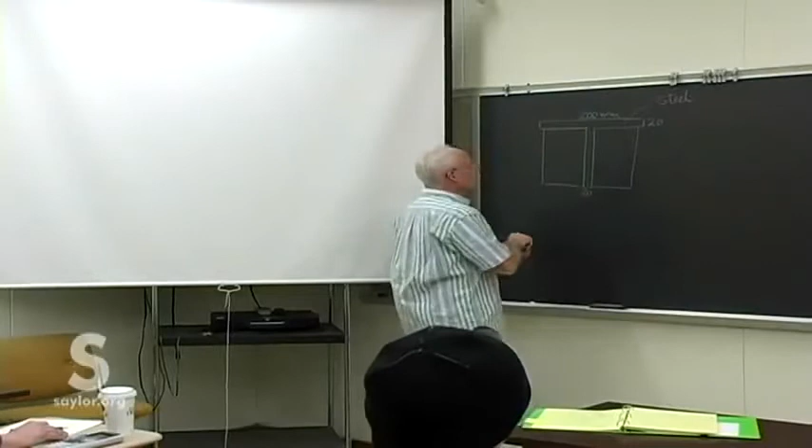And so I left you with a beam something like that, 200 millimeters across the top, 20 millimeters on that flange there, as well as down here on that T section. And that, I believe, was a steel part of the beam, and then bonded to it we had, I believe, some kind of oak timbers.

Specifically what it was isn't too much of a concern because I believe I gave you the needed Young's modulus. So there was our set.

That look vaguely familiar? Oh, and I had a given load of 50 kilonewton meters.

All right, so there we're looking there at the cross section of the beam. This being our y-axis up that way, and it doesn't matter really where the origin is. The z-axis that way, and that's the direction of our moment using the right-hand rule.

So if our thumb is in that direction, then the moment is such that it's the usual type of bending if we look down the great length of the beam. Something like that. That then being the x-axis. So that's where we left it.

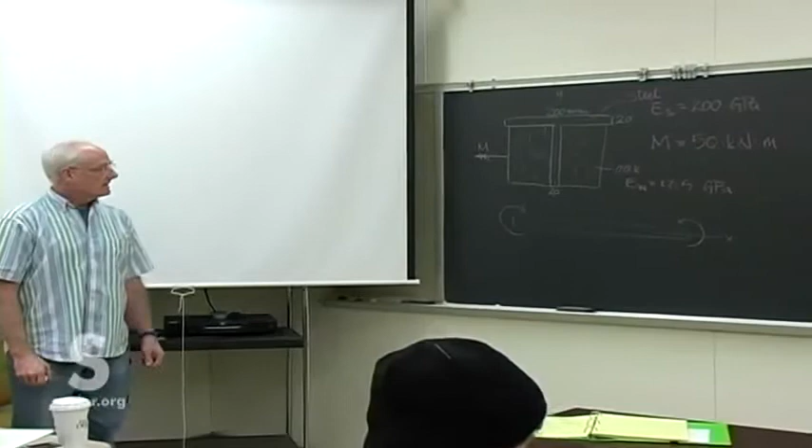The technique we're using, we don't know how to find... Oh, by the way, we are trying to find the maximum normal stress in the beam. We only know how to find that

for a homogeneous beam, a beam of a single material. But this is a beam of two materials. So our bending stress equation doesn't apply. It only applies for a single material. This is a two-material beam.

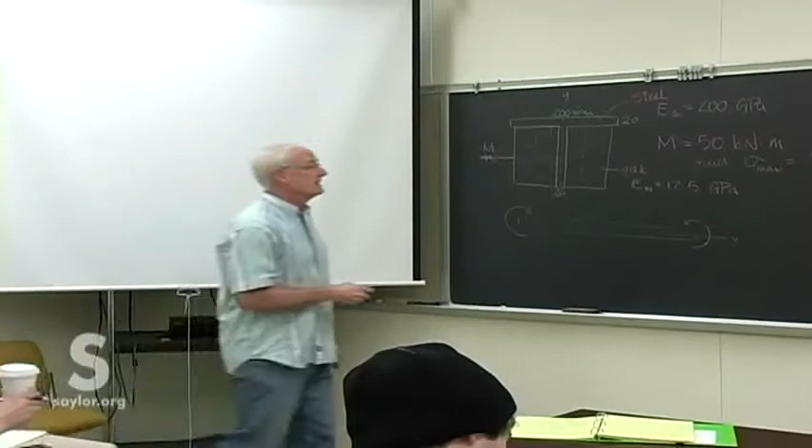But we developed the technique where we would take out one of the materials and replace it with an appropriate amount of the other material. And then we did have what we consider an equivalent beam. It's very artificial in its size and shape, but it does allow us to accurately calculate the stresses in the beam there.

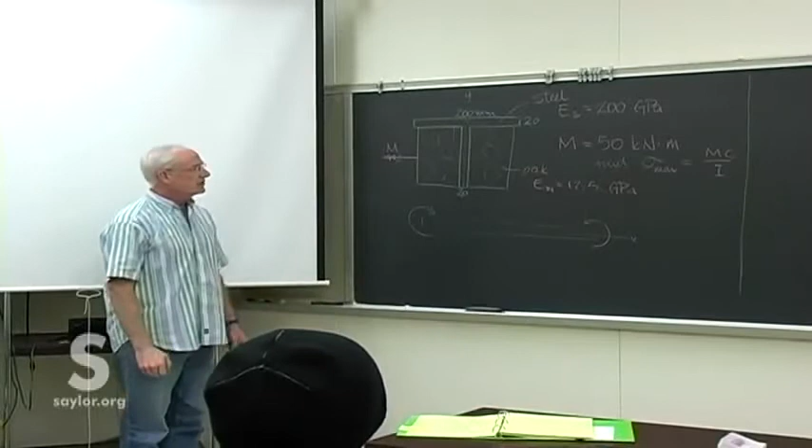So it doesn't matter which of the materials you take out and which you replace it with, you get the same answer either way, but we have to do one or the other. So did I actually suggest to do the one way or the other? No. All right, so have to pick one or the other.

I'll replace the steel with wood in the beam. So anywhere there's a steel part of the beam, I'll take it out and replace it with wood. But I can't replace it with the same amount of wood that there is steel, because steel is very, very much stiffer. You can tell by the much, much higher

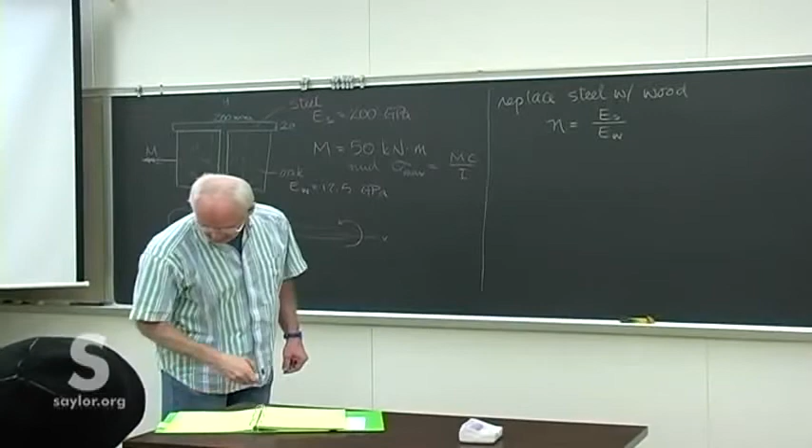Young's modulus. So we employ this factor N, and we replace the very stiff steel with N times more wood than we had steel, and that extra area will then be able to absorb the same stresses, and that allows us to calculate it as a single cross-section beam.

So N comes out to be 16 here. So I'm going to take out the steel and replace it with 16 times more width of wood. And then we'll have an all-wood beam. It's absurdly artificial in its cross-section.

So I've got the steel then is going to look something like that now that we've taken out the steel and replaced it with wood, where this top piece now is 16 times the original 200 millimeters. But we're using wood instead of steel, so we have to use an awful lot more of it. And the bottom down here is 16 times the 20 millimeters.

And that now, as ugly as it might be, is all wood. It even looks like wood. What an amazing sketch that is.

And then we leave the original wood in there. Oops, I forgot to give you the dimensions on that. 300 by 75. So the wood's 300 tall, 75 down. That remains the same. So we have this additional 75 here. The whole thing was 300. That doesn't change.

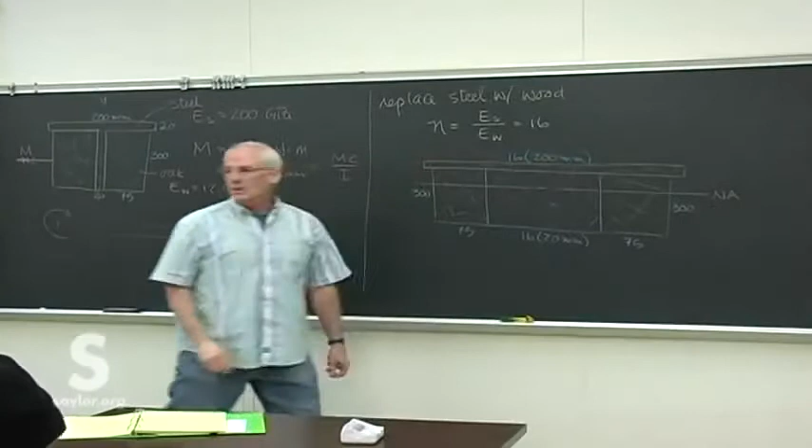We're given MC, remember, is the distance from the neutral axis. The trouble is, we don't know where the neutral axis is. Seems apparent that it's going to be somewhere about there, but we don't know where yet. And we need that because C is measured from there, and the moment of inertia, area moment of inertia, is with respect to that neutral axis.

It appears that the distance C will actually be that one, because the neutral axis is going to be a little bit more near the top because of the little bit greater area of that upper flange part that was steel in there.

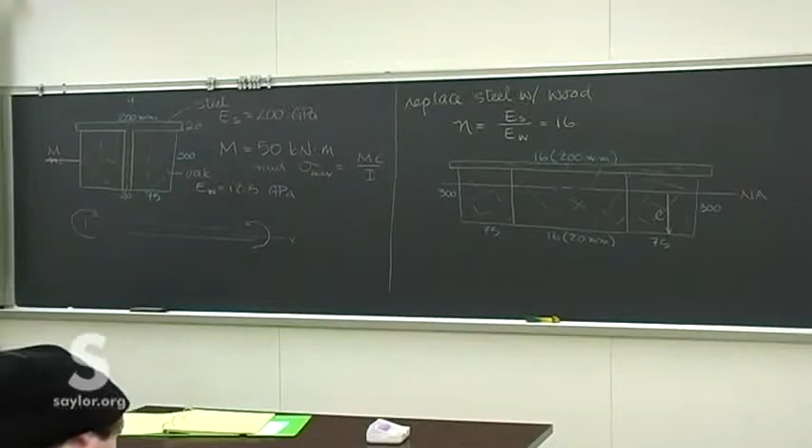So that's all the setup. Bit of a reminder from what we did on Monday, and then everything I gave you to do on Tuesday. I gave you on Monday for today. So, who did it? Anybody? Go ahead and check. Yeah, I think you guys are doing work in your other classes. We're going to have to stop that.

All right, we'll do it real quick, because we're going to need this procedure for what we're doing, with the extra part of today's work.

So we need to find out where this neutral axis is. So as easy as anything is just picking a reference line of some kind and measuring it from there.

You can pick a reference line anywhere you want. So what I happen to do for this one is midway down the bottom part, I pick my reference line. So that puts it 150 up from the bottom and 150 from the interface with the top flange. No particular reason to do that.

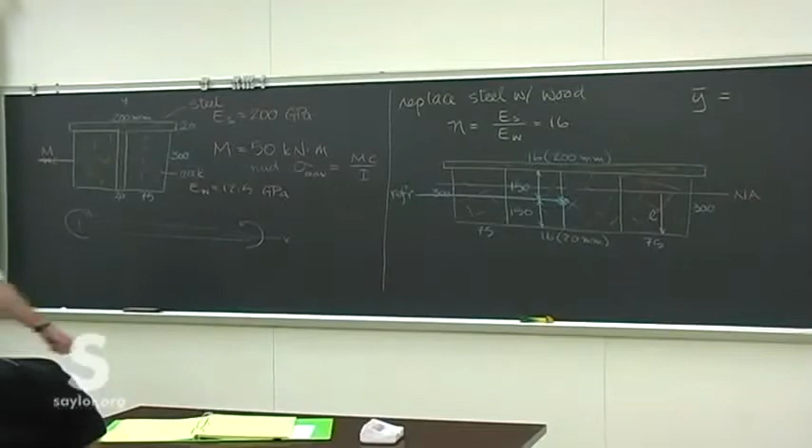It's arbitrary wherever we pick it, because what we want to do is locate this neutral axis. And once we've located it, then it's fixed to the cross section, and we don't have to worry about anything from there on. We don't need an arbitrary reference point, because now we know where the neutral axis lays, and it becomes a permanent part of the cross section.

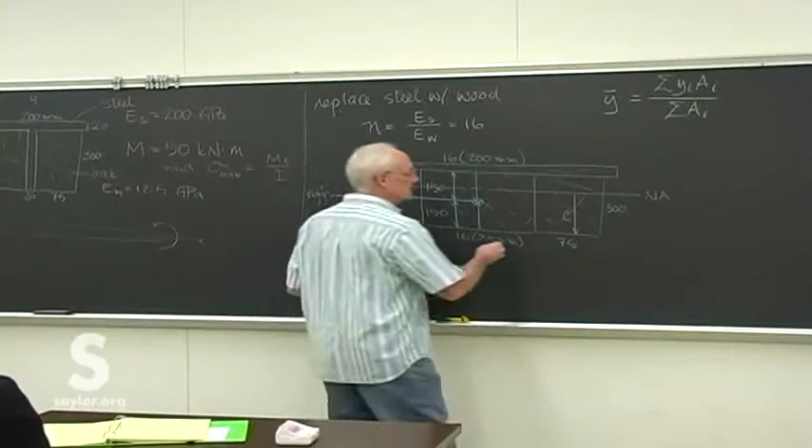So this is a relatively easy beam to do. Maybe I'll call that piece 1, and this whole bottom piece is piece 2. Remember, you don't need to do these different sections because the whole bottom piece is wood. There's no reason to split it out into the different parts. So we've got those 2 pieces.

We need the location of the centroid for each of those with respect to our arbitrary reference. We need the area, and then we need the product of the 2. And it's the area and the product of the area and the individual centroids that we then add up.

So we have 2 pieces here. With respect to our arbitrary reference, it should be, let's see, 150 millimeters up, and then halfway into the beam to the centroid of piece 1. So that looks like it's 0.16 meters, or 160 millimeters. Does that agree?

Everybody understands specifically what you're looking for there in that first part of the table? It's very important, and you need to take your time doing this, because it's really easy to accidentally slip and look at the wrong thing, or just go through it a little too quickly.

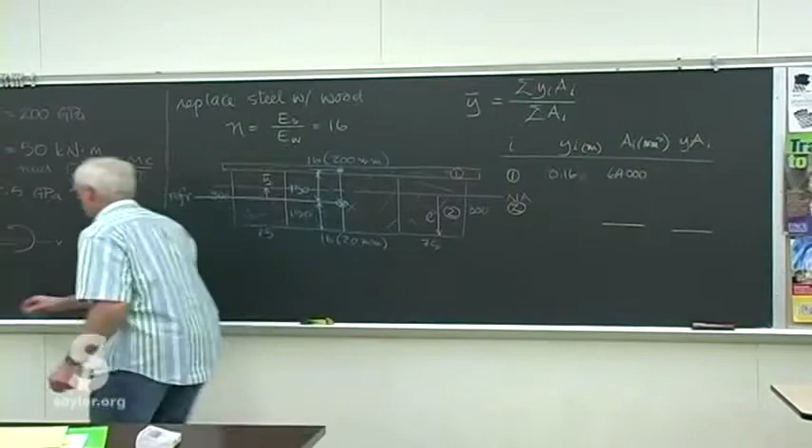All right, so we just have to check the units when we go. I just didn't have that number in progress. And then the product of the 2, might as well do it in millimeters. It's easier to just swap back all at once. So we'll just make this one millimeters. So that's 160. So John, 160 times 64,000.

10,240,000, and that's millimeters cubed. And then we do the same thing for 2. No, 10 million. 10 million.

We probably would have caught that because we know about where the neutral axis will lay. And then the second piece, the location of its centroid with respect to my arbitrary reference point is 0, because this goes right through that. What that does is make things an awful lot easier. It eliminates, well, it doesn't eliminate the area, but it does eliminate the other two.

Just makes the calculation a little cleaner, a little simpler. And so the area of that becomes 2 times 75 plus 16 times 20 times 300. 141,000. We're trusting John on this. We could do worse, I'm sure. And then whatever those totals are, we can then finish this.

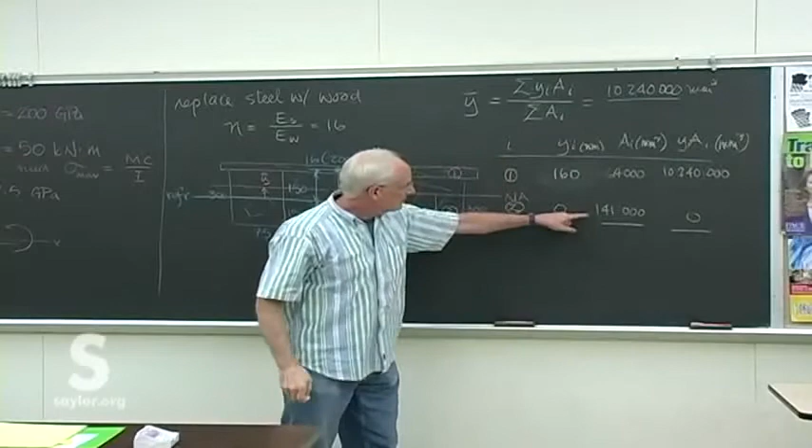That one's easy, I'll do that one. And that's millimeters cubed. And these two, what should that be? 205? Yeah, like a 49.95 millimeters.

Okay. Equals 49.95 millimeters, we'll call it 50. So we know that this distance right here is now 0.05 meters. Seems about right, about where you'd expect it to be.

All right, what next? Now that we've located the neutral axis, we need to figure out what the moment of inertia of this artificial cross-section is with respect to that neutral axis.

And remember the moment of inertia of a compound shape, which this is, it's got the long cylinder, the long rectangle top and the fat rectangle bottom, is the sum of the individual moments of inertia. Remember though that this one requires an adjustment for the parallel axis theorem.

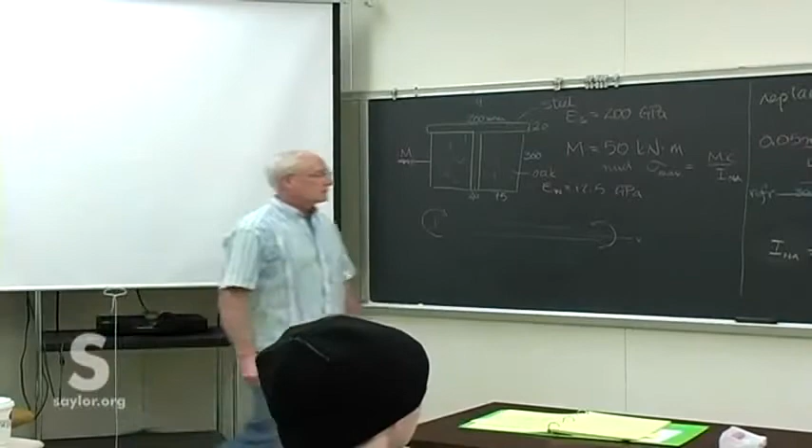So the moments of inertia with respect to the centroid here is pretty easy. That's the 1/12 BH cubed. It's straight out of the front cover of the book. Nice regular shape. And then the A, of course, is the same area we had there in the middle column

for each piece. And D is the distance the individual centroids are from our neutral axis, which for the bottom piece we already know that happens to be y bar. So you can see some of the wisdom there in picking that as our original reference line. A lot of the numbers are already available.

All right, without belaboring that too much, you can double check that you get the same thing here. I got 2.19 times 10 to the minus 3 meters, and it's meters to the fourth. 2.19 times 10 to the minus 3.

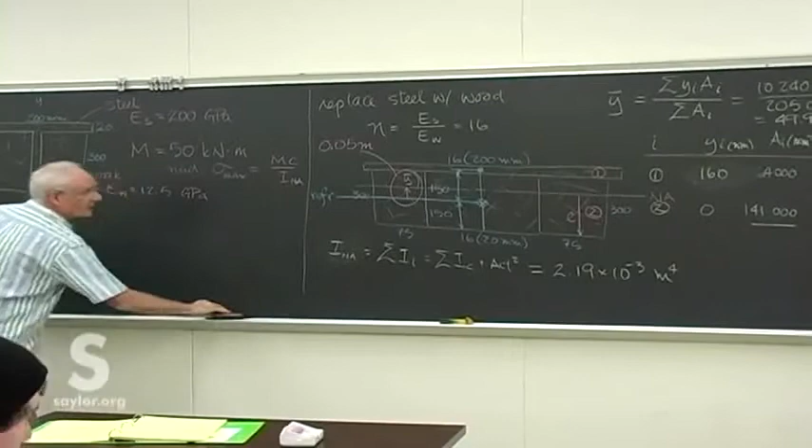All right, you can double check that one. Again, if you prefer, it does do quite well if you make a little table out of it, very much like we did here, where you have the individual values of the centroidal moment of the area and then the parallel axis theorem bit there.

That's all geometric mechanics, I guess, if you will. But now we can get to the actual material mechanics by applying that bending equation we have there with the appropriate values that we now have.

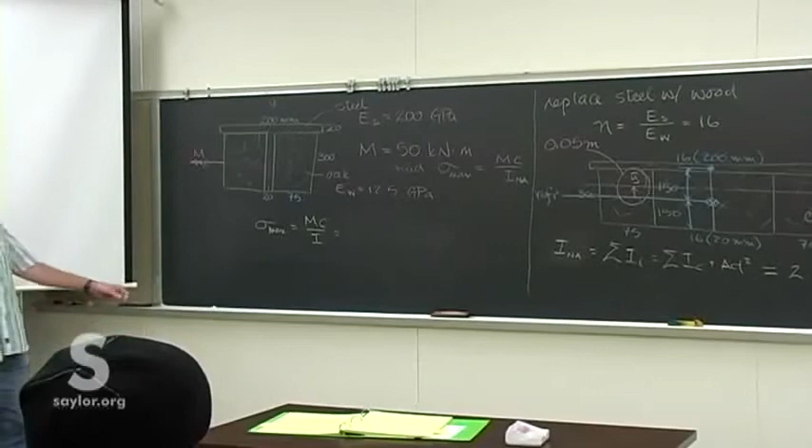Remember though that we have two different materials and we have to figure out the stress in each. We've made this artificial beam entirely out of wood, so if we use those straight numbers, that's what we're going to get, is the stress in the wood.

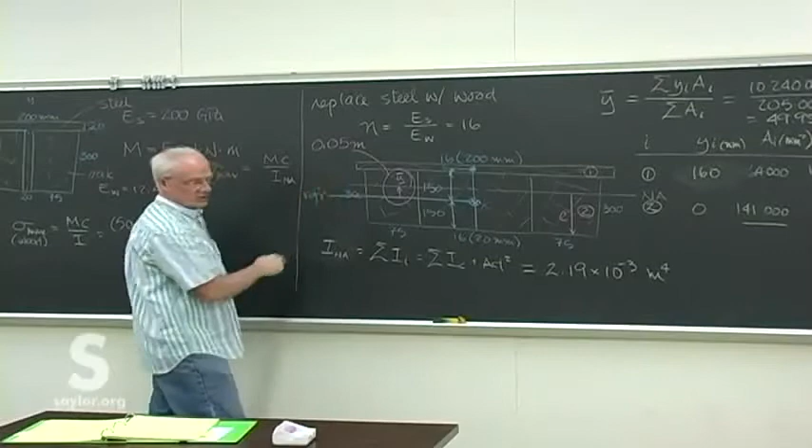C being the greatest distance from the neutral axis. It could be up or it could be down. We're not sure. It could be different for any one of the problems. In this case, it happens to be down, and so that distance is, the whole piece is 320 across, and we're up 0.05, remember, or 50 if we're doing millimeters up from the neutral axis.

So C comes out to be 0.2 meters. That's what you just said, John? You got that? Okay. That's this distance here from the neutral axis down to the very bottom, divided by our moment of inertia.

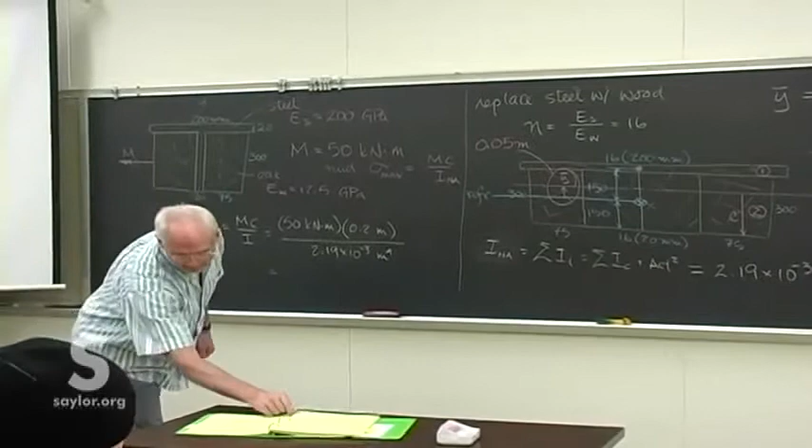That's the stress we expect in the wood at the bottom, because that's the farthest distance away from the neutral axis. Remember, when we have a uniform material,

and we look at it from the side, we know that the stress is linearly varying on either side of the neutral axis. The top being in compression, the bottom being in tension.

What, however, is the stress in the steel itself? That's the stress in the wood, because our artificial cross-section here was an all-wood beam. But now we've got to go back and figure out what the stress is in the steel. Remember how we find that?

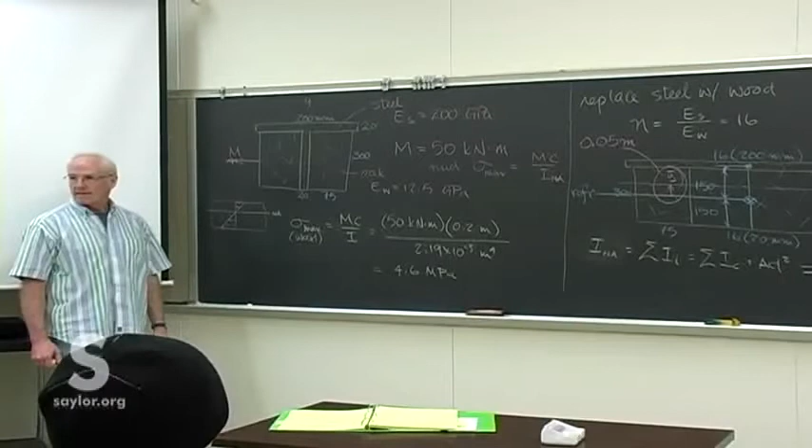You have to be a little bit careful with it. For the most part, it's the same calculation with a little bit of an adjustment. Since the steel can absorb so much more of the stress, it's the factor N.

Just make sure what you use for I. C, again, is the greatest distance from the neutral axis to the farthest bit of steel, which is the very same number we used before, because it's this part of the steel down here that's in the greatest stress. You might be tempted to go up to the top because that's where most of the steel is, but that's not what the concern is. The concern is where are we the farthest away from the neutral axis.

So we use the same C we used before, and so in fact it's just N times the value we had before. N times 4.6 megapascals, 73.1.

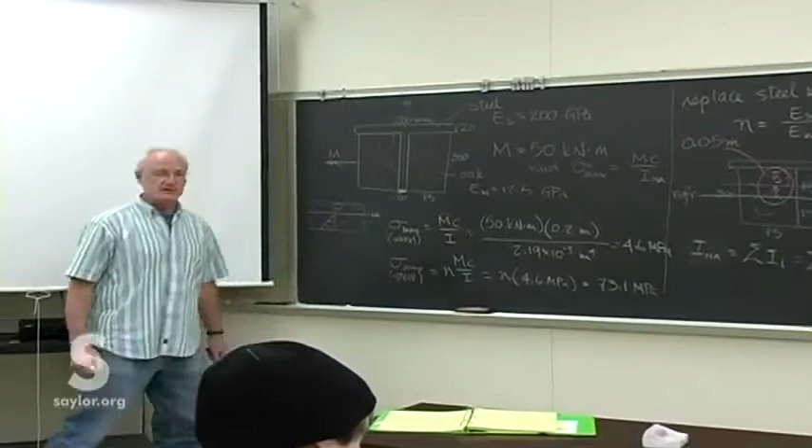And again, for each of those, you can compare those to the yield stresses to see if we're safe, whether one or the other will fail first. So, mostly a refresher, just with a new problem, because we're going to need that kind of stuff for what we're doing next. We need the very same ideas.

So any questions with that one? Everybody comfortable with it? Phil, you're all right? Samantha, comfortable? Like that? Colors are okay? All right, colors are awesome. We all know that. All right.

So we're going to take the very same idea and do another composite beam. Remember, we have two terms we use. Compound cross-sections are cross-sections made up of several different shapes. Composite beams are beams made up of different materials. So we're going to do another type of composite beam now, one with which you're all very familiar, maybe not in the specifics of it, but in the generalities of it.

One of the most common building materials, especially for structures, is concrete. However, concrete beams offer their own advantages, but their own disadvantages as well. The advantages are that it's very easy to cast concrete beams in a wide variety of cross-sections.

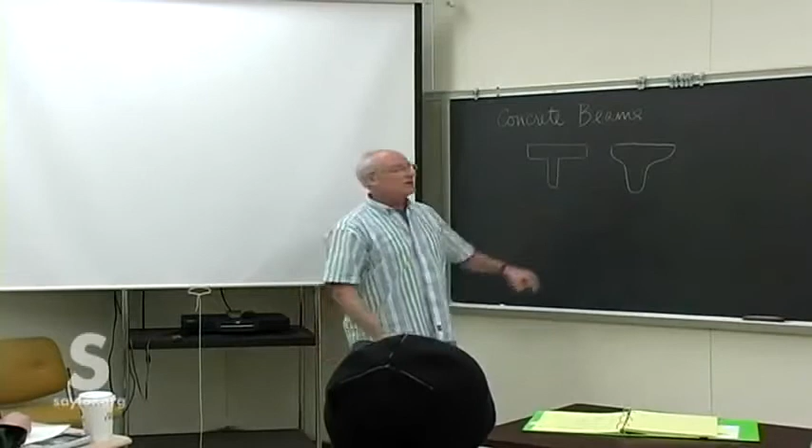You can also do other things very easily, cast cavities in those for cables or piping or any other pieces you might need. It's also rather easy, even in significantly tall skyscrapers, to deliver concrete to the site in its liquid form, pump it up, cast it in place, and then you don't have to carry in the significantly long beams that some of these buildings might require, especially as architects are trying to open up spaces, meaning there's less interior walls, longer stretches for beams in some of these newer buildings.

Concrete's also not all that expensive. It's, for the most part, dug out of the ground. However, there are things that worry us in the use of concrete beams. In any beam that's loaded and supported in our usual way, our simplest way, we look at simply supported at either end and then some kind of loading in between that is downward, whether it's a uniform load or a point load, doesn't matter.

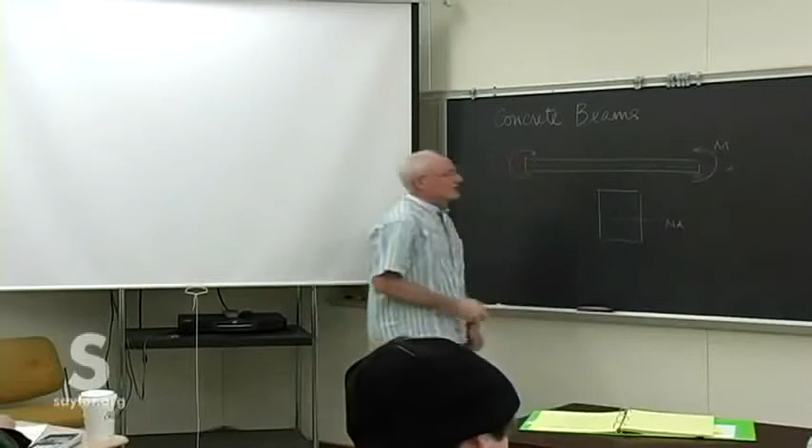The trouble is there's going to be generally a moment like this, the very type we've been looking at. And when we look at the cross-section of the beam, and we'll just keep it simple and use a nice rectangular one, we know that for that kind of bending moment on a beam looked at from the side in that way, the top is going to be in compression. By the top, I mean anything above the neutral axis. Below the neutral axis, everything will be in tension.

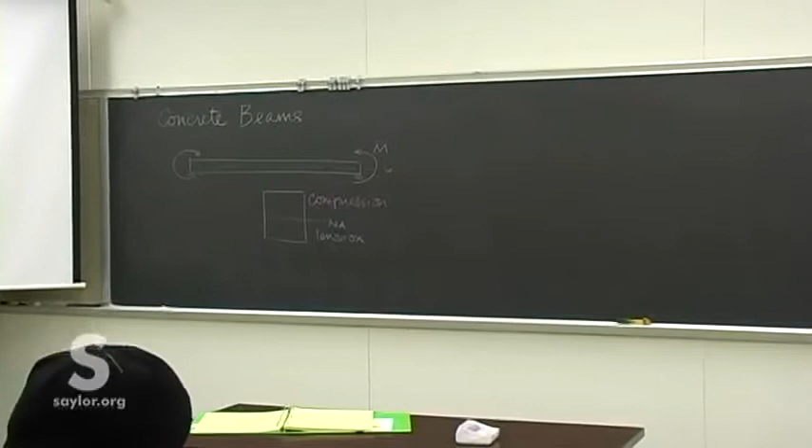The trouble with that is, with a concrete beam, concrete is terrible in tension, which means the entire bottom of the beam is exposed to almost guaranteed failure for a simple concrete beam, a beam of nothing but concrete material throughout, a homogeneous beam. You've got this entire bottom part of the beam, especially the lower part, that's exposed to extreme tension, and concrete is terrible in tension.

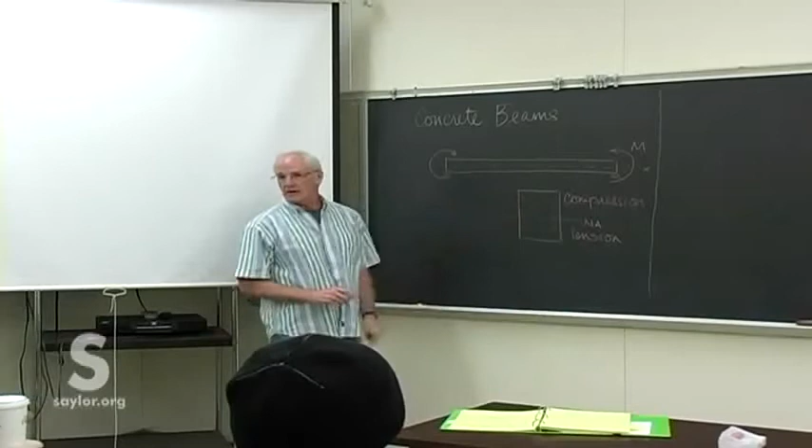So the solution is then to not have a single material concrete beam, but have a beam that has running down it the entire length some reinforcing bars, or what we know as rebar.

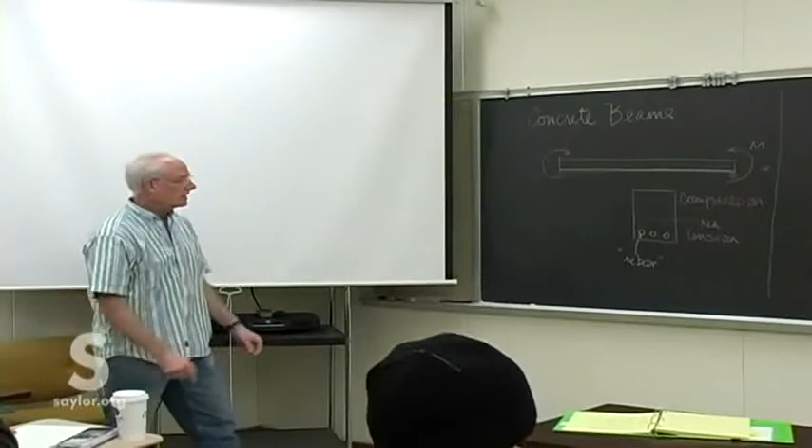You've all seen, you all heard of it, I know. If you pay attention as you come into the building, you'll see it, because the concrete is starting to break away with the age of this building, and you'll see little bits of the rebar down there. Some of that is used as a network throughout the material, just to hold it together, and it's in all directions.

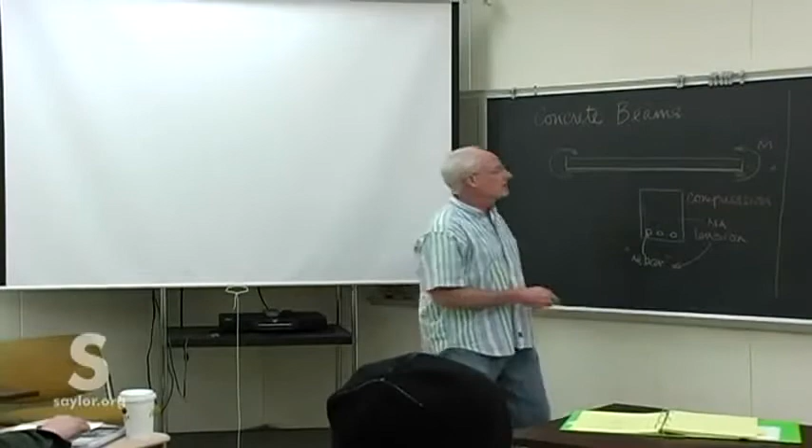But we're going to look at rebar running the length of the beam that will then absorb all of the tension, and we can then use all the advantages of concrete, but have much less of the disadvantages of concrete.

So here's how we're going to approach this. Here's our idea. Here's the beam in cross section, with a couple reinforcing bars running down the length. Remember, this is the cross section.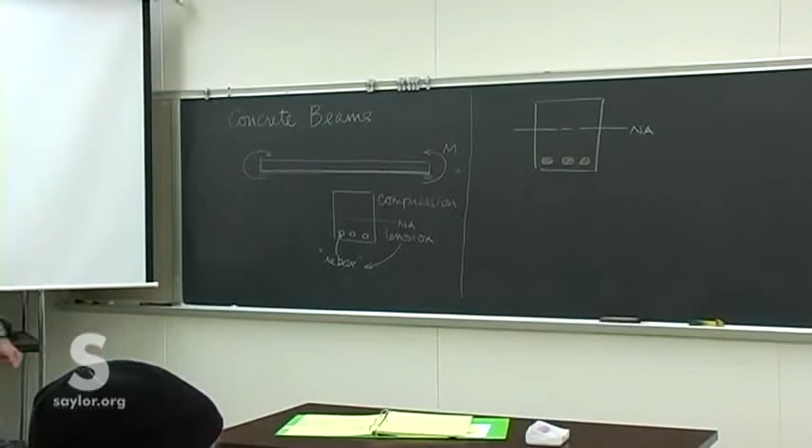For our analysis purposes, realize that from the neutral axis above, we have concrete in compression, which is no worry. Well, it's a worry in that there are limits to that, but in general, concrete in compression is not a significant worrisome factor, certainly compared to the bottom of the concrete being in tension.

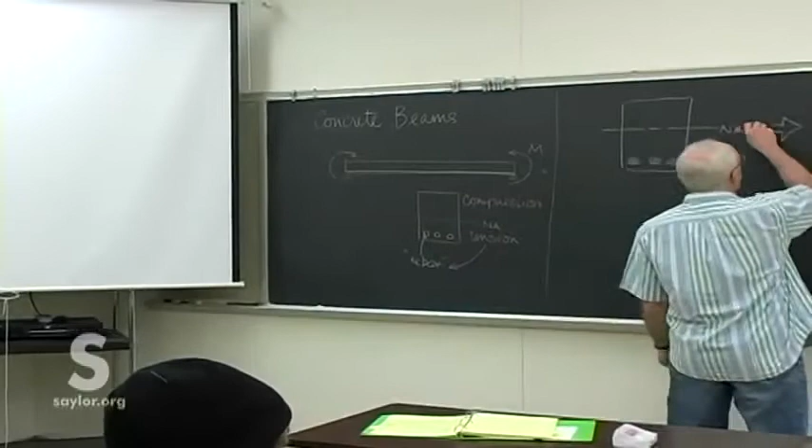So we're going to transform that beam. Remember, we cannot analyze directly beams made of two different materials. So we're going to do what we did before: replace the rebar with an equivalent amount of concrete, and then analyze our beam as a single homogeneous beam from there.

So we'll leave the top alone, because that's concrete in compression and we're not real worried about that. What we're worried about is the concrete in tension below.

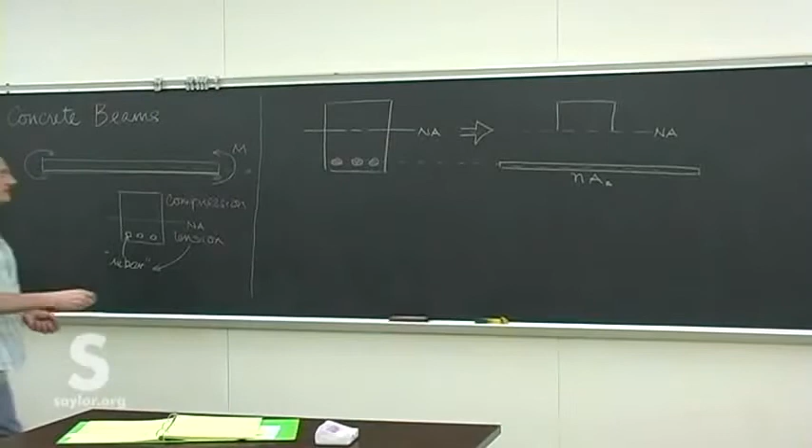And AS is the area of the steel rebar in the original piece, which is these three pieces right there.

What that means to us is that for the most part, we are completely disregarding any of the concrete below the neutral axis. We're throwing it out. It's in tension. Concrete doesn't do well in tension, so let's completely take it out of the analysis if we have it in a mode where it's going to fail in the first place.

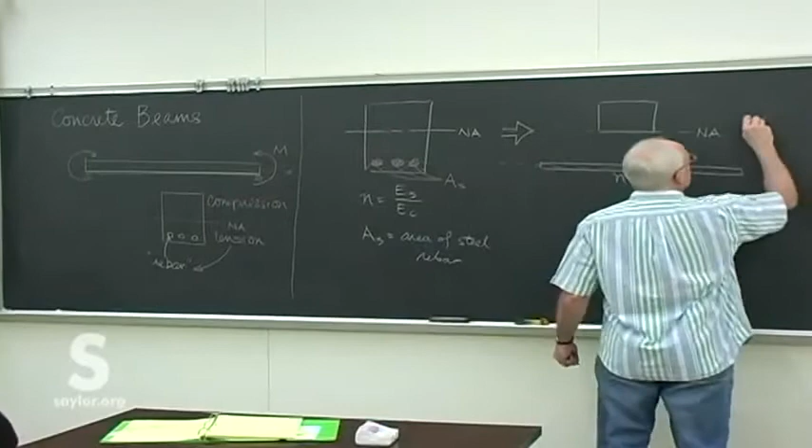And so now here's our equivalent cross-sectional area made up entirely of concrete for purposes of analysis. And then we can do our usual analysis to figure out what the stress is in both the concrete in compression at the top and the steel in tension at the bottom.

Got the general picture. We've got a beam made of concrete with installed rebar. We take out all the concrete at the bottom because it's in tension, even though it's only minor tension near the neutral axis, but we're going to take it all out because concrete in tension is just not an easy thing to work with in practice.

We're going to replace the steel rebar area with an equivalent amount of concrete area, and then use that beam as our beam for analysis. Which will essentially include concrete

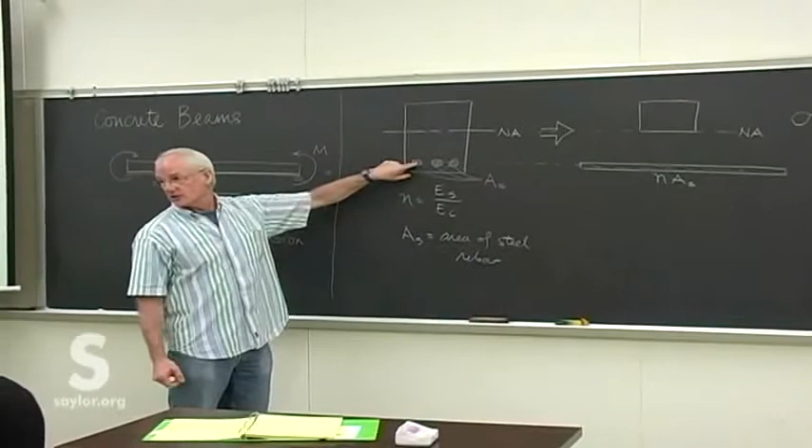Remember, this is an entirely artificial replacement. We're doing this just for the purpose of analysis. This concrete will be in tension, but we've got so much of it that we're all right. The number N we've got coming up here, we'll do in a second. N is like 8, at least, something like that.

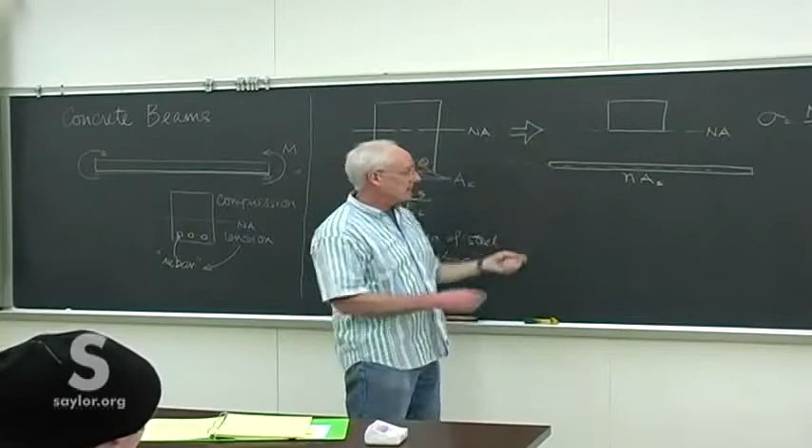Trouble is, we don't know where the neutral axis is. We need the neutral axis on this beam. So we're going to use a slightly different way to do it than we did before.

And that's by, for each of the two areas, we're going to figure out where the neutral axis is by adjusting, placing it such that y bar A above equals y bar A for any of the area below. It's a rather straightforward, easy way to do it.

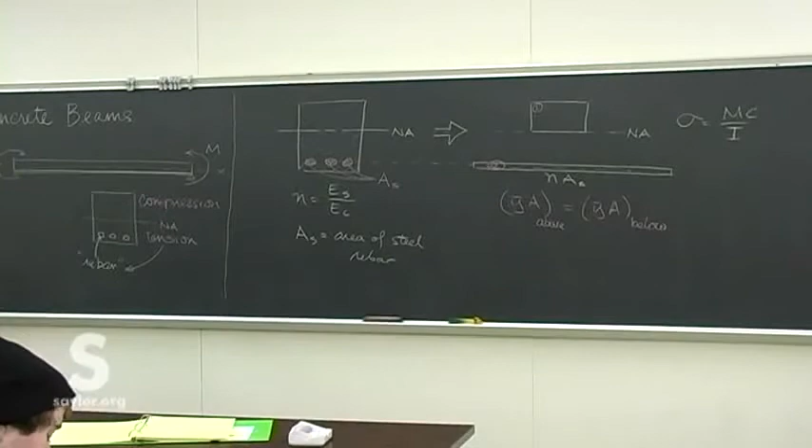In practice, it looks something like this. We don't know where that neutral axis is, so we'll call that distance x. Again, it's arbitrary, the same as what we were doing when we picked an arbitrary reference point earlier. We'll call that distance x. Let's give some total height to the beam. I'll call that L.

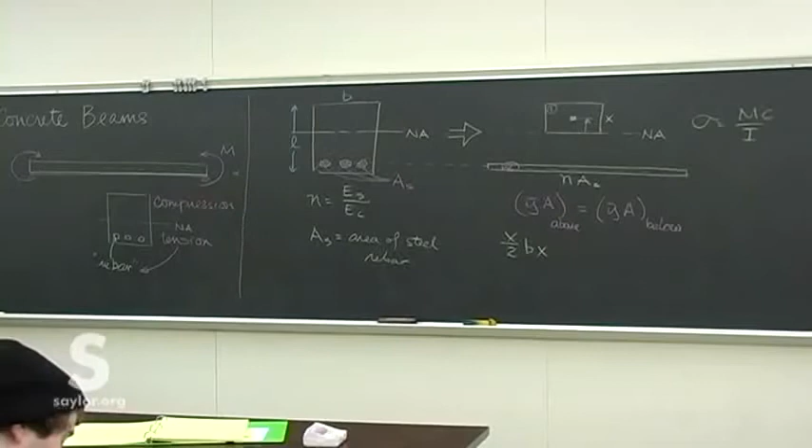And a width B. And so y bar A above, remember, is measured from the neutral axis, so that'll be x over 2. That's this distance here, times the area of that section above, which is B times x. Remember, what we're trying to do is find out what x is, so this is artificially placing it. That's y bar A above. And if we have a different shape, a T-beam or something, then we just do that for the two little pieces and add them together.

And that's got to equal y bar A below. Let me adjust this a little bit. Sorry, this L is only down to the level of the rebar. Remember, all the rest below it is concrete, and we're completely throwing that out of the picture. So from the top of the beam, which is concrete that we leave in compression, down to the middle of the rebar that we've replaced now in our imaginary picture.

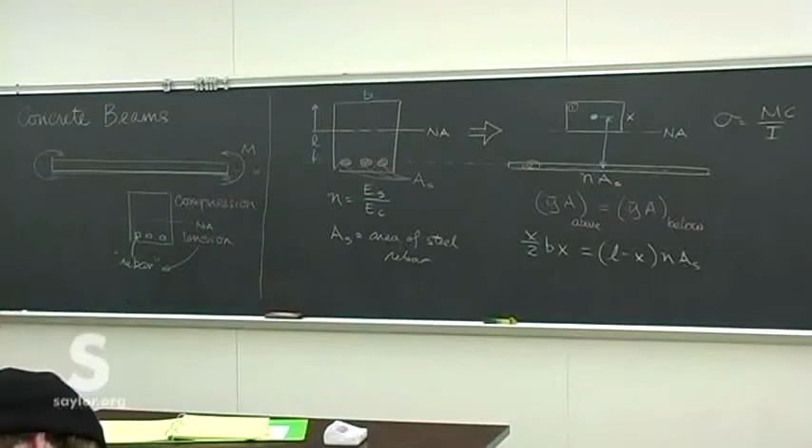So now y bar for the area below is that distance, which is L minus x. And L is not considered unknown, it's the height of the beam from the top down to the rebar, so that's one of the design parameters. And then the area below is NAS, where N is known because we know what materials we're planning on using and their strengths, and we know how much rebar we're planning on putting in. So the only unknown is x, and then we can solve for it, and then we know the location of the neutral axis on our new beam.

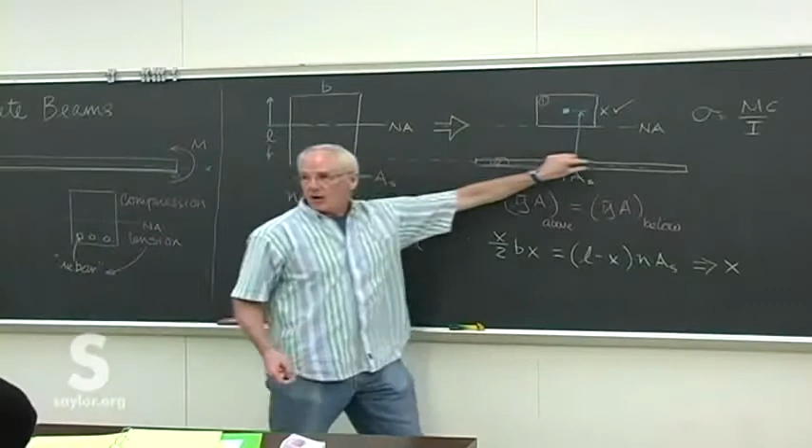It's not L minus x over 2. No, this is very, very thin. All we're doing is giving this an area of NAS, we're not actually giving it any thickness. This is all L, we take x out of it, we're left with L minus x. And that will then give us x.

And then from there, we need to calculate the moment of inertia with respect to the neutral axis of our artificial cross-section, and then that's what we use to calculate the bending stress, MC over I. We can do it again for both the steel below in tension and the concrete above in compression. All right, so that's the picture, that's the steps. We'll go through some of the specifics and make sure that they work out now.

So here's a beam with the cross-section exposed. We've got 2 rebar running through there, and then the dimensions: center to center on the rebar is 6 inches with a little piece of 3 inches on either side. So we have two steel rebar centered and separated at 6 inches with 3 inches on either side. The location of the rebar to the top of the beam is...

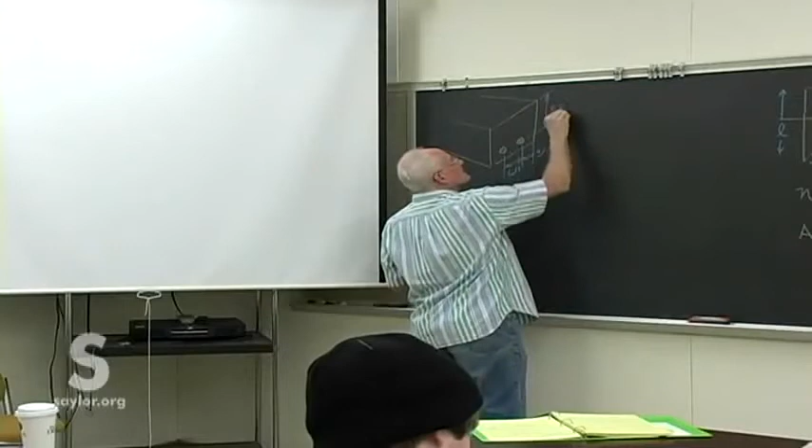Oh wait, sorry, nope, that is down to the bottom. It's 4 inches down to the rebar, so that's all the way down to the bottom, 4 inches just down to the center of the rebar pieces. So we've got an extra 1.5 inches of concrete below, which we're going to throw out in our analysis. And the rebar is 5/8 inch in diameter.

All right, I think that's the picture. All I need to do is give you some bending load for it: 40 kip-inches. And obviously, I hope, a bending moment such that the top's in compression, the bottom's in tension.

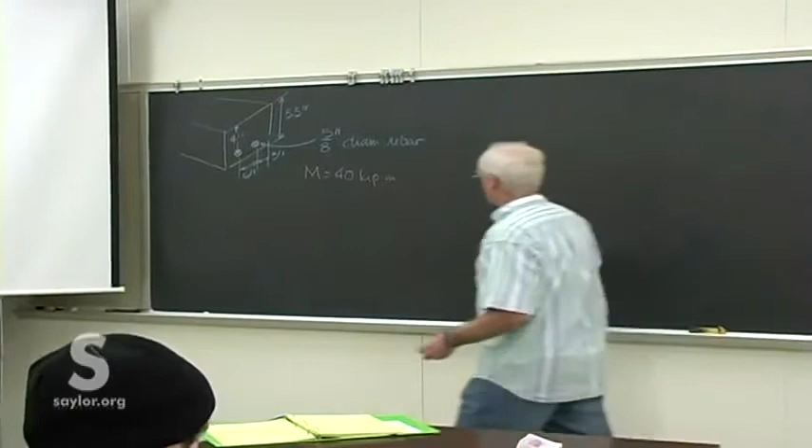Okay, so, what? Modulus? Oh yeah. So we've got a beam, let's see, it's 12 across there, 5.5 high, but we have 2 pieces of rebar running through it, at 4 inches. So that's the cross section.

The modulus of elasticity ratio is: steel's like 29 times 10 to the 6th psi, concrete's about 1/8 of that, 3.6. So that comes out to be something like 8.1.

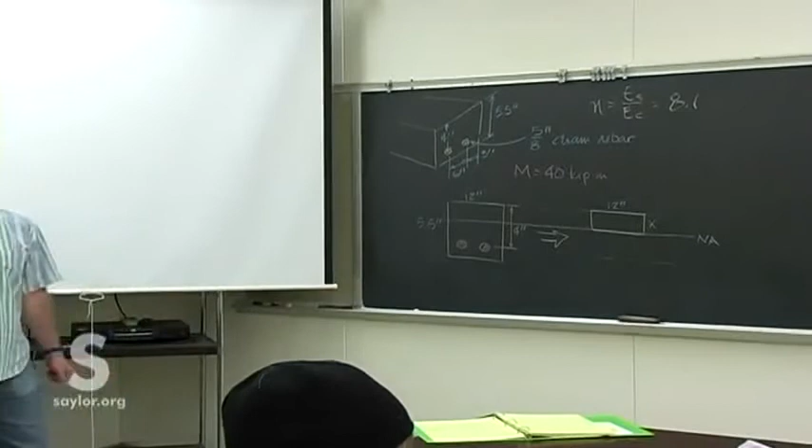So let me move that out of the way just so I can draw the equivalent beam, same height. And remember, we're going to take out the rebar and replace it with an equivalent amount of concrete. So at some unknown spot, we have this neutral axis, where all of that material above that is in compression. I just don't know where the neutral axis is yet. That's what we have to find next.

And right at the same level as the rebar was, we replace it with a very, very thin strip of area NAS of concrete. Notice what that means is we completely ignore any of the concrete below the neutral axis. All of that is thrown out and ignored, even though it can withstand some tension, but in general it's so poor in tension we're not going to allow it into the analysis. So that's our equivalent beam. As artificial as it looks, for purposes of analysis, it works quite well. What's next?

Just plug in the number. We need to find out what x is. We need to place the neutral axis and then calculate the moment of inertia from there.

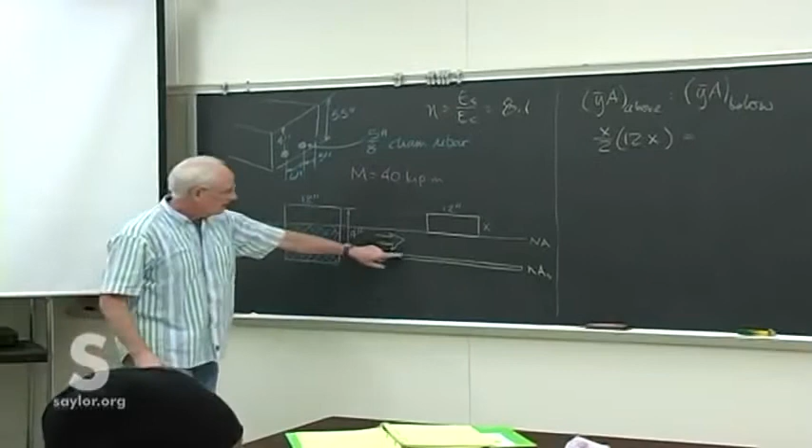Y bar A below, let's see, y bar below is the 4 inches minus the x. It's just the distance from our neutral axis, where we don't know where it is yet, down to the center of our concrete strip. So that's 4 inches minus x. And then the area below is N times AS. And we know what N is, and we know what AS is because we've got 2, 5/8 inch rebar in there.

Where N is 8.1, AS is 2 times pi r squared, 2 because there's 2 bars. That comes out to 0.614 square inches. That's the cross-sectional area of the rebar where we're assuming all of the tension will reside.

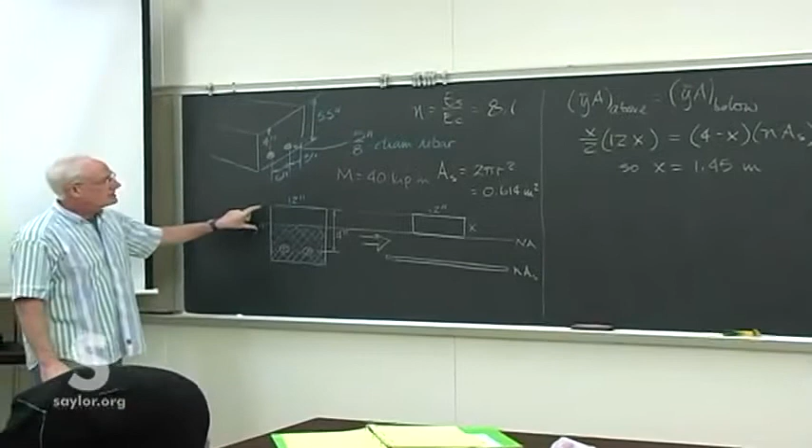So we've got N, we've got AS now, we just solve for x. 1.45 inches, which would seem about right. 2 inches is midway between the top and the rebar, and we're going to be a little bit above that because we've thrown out so much of the bottom area. All of the bottom concrete area is gone, this is just area of the steel. So now we know what x is. It's about where it should be.

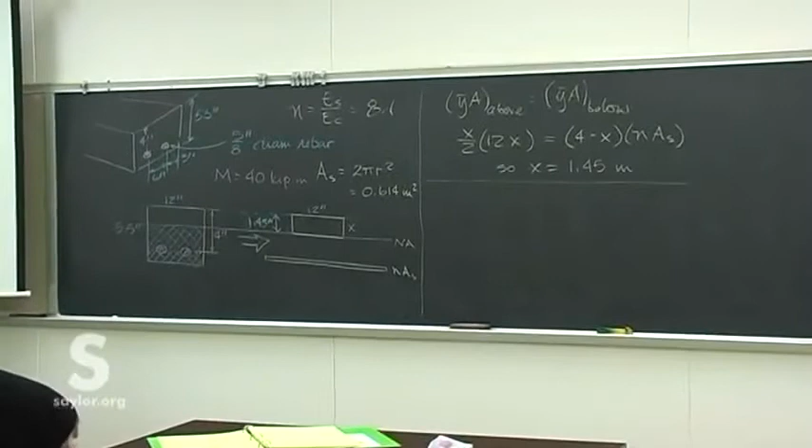Is it okay, John? Trust me, I never put wrong numbers up. Check the tapes.

Now what? That was always our first step, determine where the neutral axis is. Once we've done that, now what do we do? Find the moment of area with respect to that neutral axis. And that's, as it has been before, just a little bit of a trickier step.

Not a tricky step, it actually makes things very easy. It's just not necessarily an obvious step. So if we do what we usually do, make a little table out of it. We need to find the centroidal moment of inertia plus d, and then we have IC plus AD squared.

So for the top piece, it's just a nice rectangle. Its centroidal moment of inertia, remember the moment of inertia about its own centroid is 1/12 bh cubed, actually in this case bx cubed. D is, remember, that's the distance of the centroid of 1 from the neutral axis, which for our purposes is x over 2.

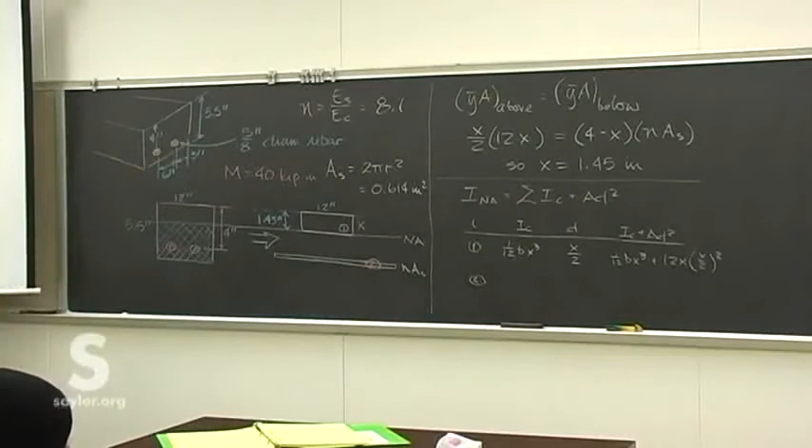And you can actually put the numbers in, see if we get the same thing. And then that gives, oh well, I don't have to have that number, whatever it comes out to be. It's just plugging the pieces in now. The area is 12x. So it would be 1/12 bx cubed plus 12x times x over 2 squared. That's IC plus AD squared. I just don't happen to have that separate number, so that's just algebra.

Now, here's the little bit of tricky part. This strip is so skinny and narrow that we take its moment of area to be 0 and don't bother calculating it. If we're going to calculate it, it's 1/12 bh cubed, but it doesn't have any height for all intents and purposes. All we're concerned with is its area, so it's just so skinny, we leave that out of it.

D is the 4 minus x we had before, because we may not know how thick it is, but we do know where it is. And then, of course, its area is N times AS. So this just becomes N times AS times 4 minus x squared. That's I, which is 0, plus AD squared.

You can see how easy this would be to do on a spreadsheet. All right, so that gives us an I of, when we put all the numbers in, 44.4. That can't be right, I just wrote the units down wrong. I to the 4th, inches to the 4th. 44.4 inches to the 4th, I believe.

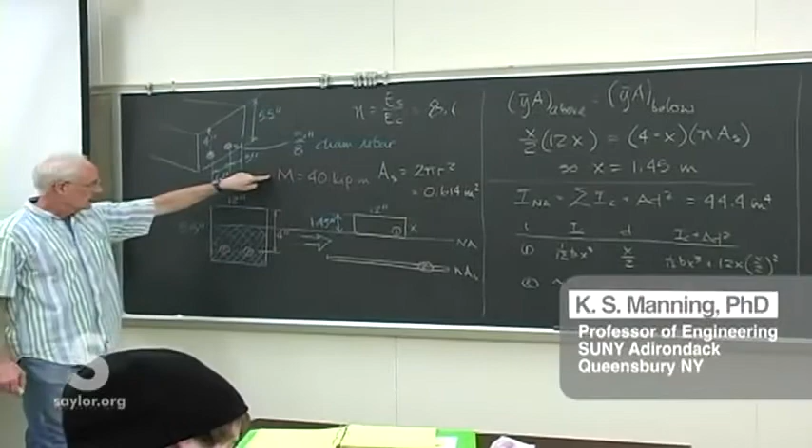Now what? Now find the stress. We need to find the stress in the concrete and the stress in the steel. So you do those. We've got moment, 40 kip inches. We've now got the moment of inertia with respect to the neutral axis. And the unit should be then kips per square inch, which is KSI. But I want to see what numbers you choose to do this.

Travis, while you were out, the most important thing you probably missed is when we figured out the moment of inertia with respect to the neutral axis. We do it by summing up the centroidal moments with the parallel axis theorem applied.

For the strip that replaces the rebar, we consider it to be so very thin, we know what its area is, but we don't give it any thickness. It's so thin that its centroidal moment of inertia is 0. It's a subtle piece, I don't want you sitting there trying to figure out what the thickness of it is when we assume it doesn't really have any.

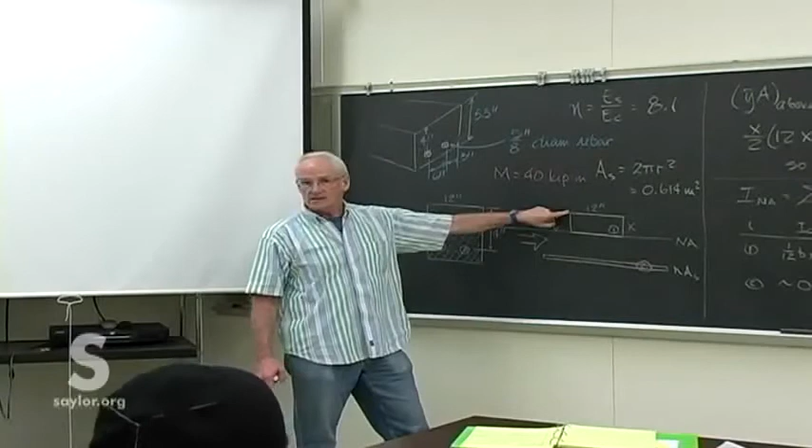What did others use? No, you're forgetting something. We don't have any concrete down here for our purposes, we've thrown it out completely. We assume that any tension on the concrete is going to cause it to fail, and we take it out of the calculation completely. So we're only concerned with this stress in compression. We assume there's no concrete there to fail in tension, we've taken it out completely. It's a conservative estimate because we've taken a lot of material out that would withstand at least some tension, but it's so bad in tension we take it out of the calculation.

And then I, where did I put that? 44.4 inches to the fourth. So we're left with kips per square inch.

So should I ask who's my favorite student and did that right? Joe, it's Samantha, you did it that way, right? Yeah? Joey, you did it that way too? Okay perfect, are you nodding that Joey did it that way, or you did it that way too? Right, so we have 1 female, 2 male, prom queens and kings.

So that comes out to be 1.31 KSI.

Now what about the steel? Multiply it by N. N is 8.1. M is 40. And what'd you use for I?

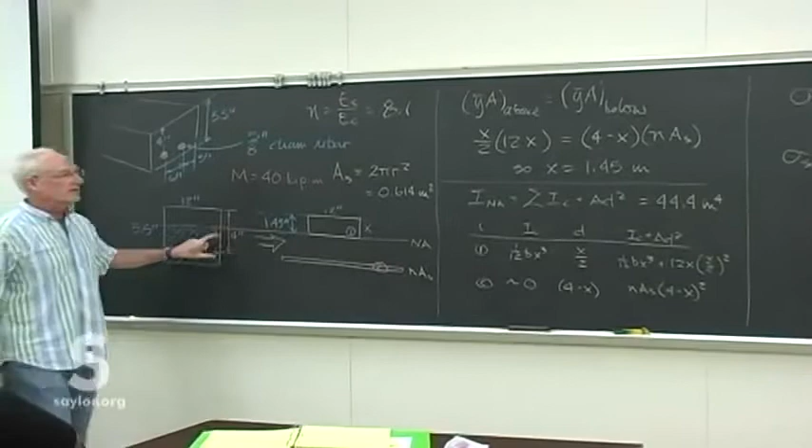Divided by, isn't that still a greater distance? Of course it's a greater distance, but there's no sense calculating the stress down here in material that we're assuming isn't even part of the equation. We've taken it out completely. We don't need to calculate the tensile stress in the concrete because we assume it's going to fail anyway.

It's there, its real purpose now is to do nothing more than hold the rebar in place. That's all the concrete does.

Yeah, it's a greater distance. In fact, the distance all the way down there would be 5.5 minus 1.45. But normally we would have used that on top as well.

Use what on top? The 2.55 inches for CM? No, no, we don't use, we're not figuring out the tensile stress in the concrete because we're assuming it's going to fail. So why calculate the stress? We want to know where this concrete is actually used for the strength of the beam, which is in compression.

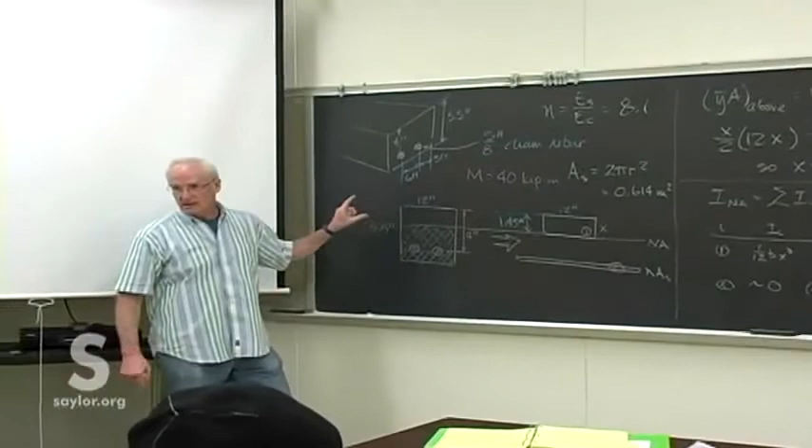On the top. I was just backing up in other problems. Oh, where it's not, yeah, concrete, we would have. Yes. Yeah, see, this is a completely different problem where we've actually thrown away part of the beam, not replaced it with something else, actually disposed of it, thrown it out.

And the tension on the steel is 18.5. So that's tension and that's compression.

If we happen to have a concrete beam loaded in some other way, for example, if we had a beam loaded this way, we'd expect it to bend the other way. We'd want the rebar on the top of that beam cross-section rather than on the bottom, because this would have a completely different type of moment than the original beam we were looking at. So it can be used in any way as needed.

Chris asked: because you got such a higher value for the steel, would you, in design, use a smaller diameter rebar, since it would be redundant and able to withstand stress, being so much higher than the concrete value?

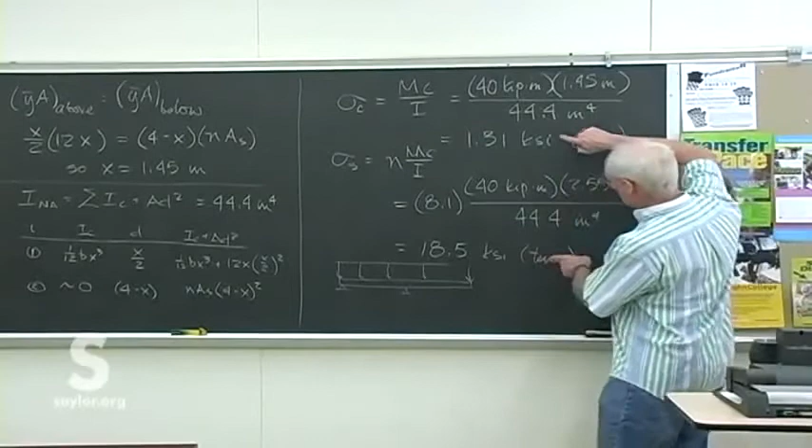The concrete would fail way before that? Well, no, we don't necessarily compare it that way. It depends upon the yield stress of the concrete in compression, which is pretty high. I don't have that written down here, so we can't look it up.

The other thing that can be done, and since I've never worked in this field, I'm not sure what the point is, but a balanced beam is one such that the stress in the concrete is the same as the stress in the steel. A beam designed that way is considered balanced, with equal stresses in the two materials. I'm not sure what the point of that is.

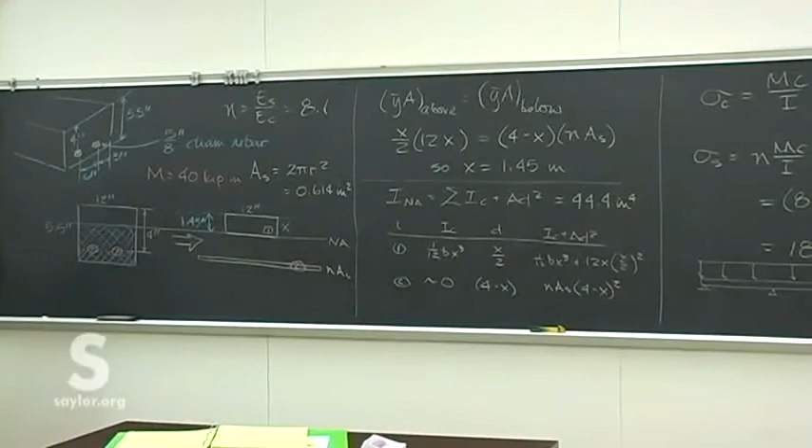It just is there. As for the geometry of the rebar, it doesn't matter, it's just area. You'd either adjust the beam for what the maximum load might be, or adjust the area such that they're balanced.

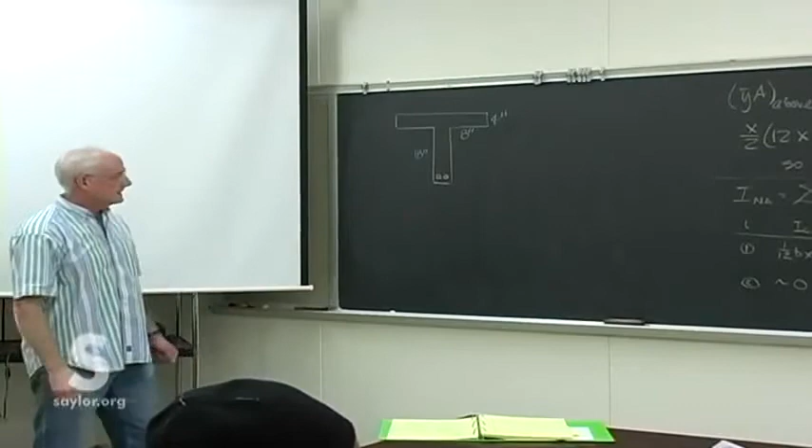Okay, one for you. Here's a concrete cast T-beam with 2 rebar in the very bottom. Width dimensions: 4 inches there, the T part has a width of 8 inches, this lower web is 18 inches, and the bottom thickness here is 6 inches across.

The rebar is 2 inches up from the bottom. And the area of the rebar — it's 1 inch diameter, I believe. Double check that, because you'll have to find the area anyway, but I'll just give it to you since I did write it down: 1.57. That's the number we need in the end anyway, the area of the steel.

All right, I need to give you a load to find the maximum moment, so you'll have to double check which material might fail first. The maximum allowable stresses: for the concrete, 3 KSI in compression; for the rebar, 40 KSI in tension.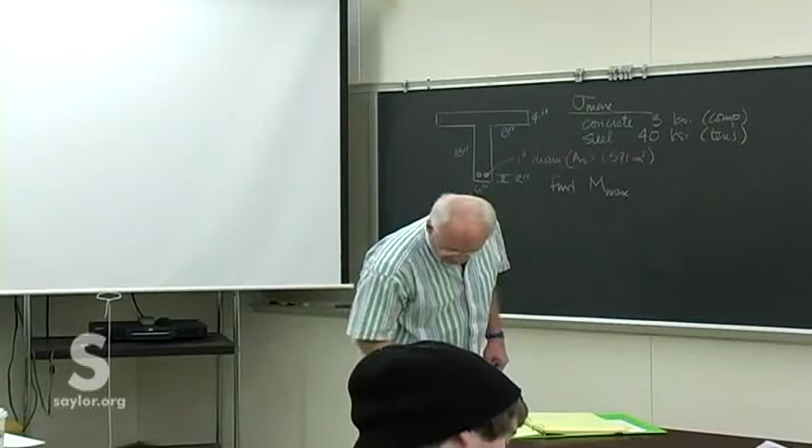So find the maximum moment. What you'll have to do is figure out which of these is the controlling stress. That means put these stresses into the bending equation, sigma equals MC over I, solve for the moment, and see which one's lower. That will tell you which of the 2 materials is the controlling material.

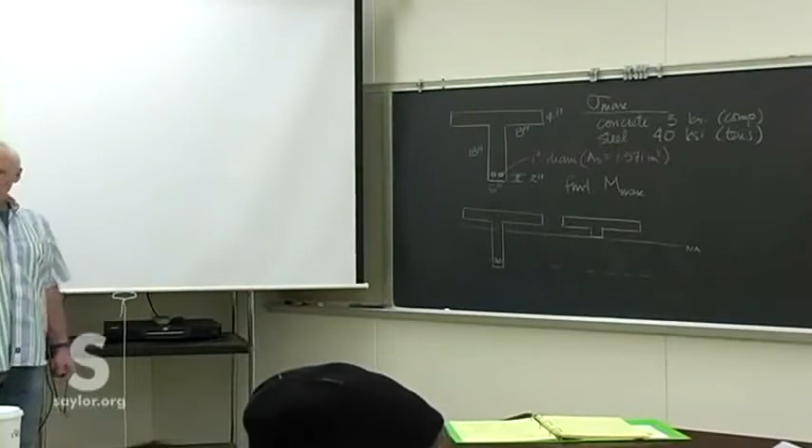All right, first draw yourself an equivalent cross-section, then determine where the neutral axis is going to be. Your suspicion, I would hope, would put it somewhere about there, which leaves a little piece. It's just a compound shape — break it into two little rectangles. Then at the bottom, we put in enough concrete to simulate the steel by using n times more of that area.

So first you need to place the neutral axis, then find the moment of inertia with respect to that, and then calculate the maximum allowable moment by using the stress limits given. You'll have to do that for each piece, and don't forget to factor it in.

As a hint, it might be easier if you set your unknown value x from the bottom of that upper flange down to wherever you make that cut, just because the flange section already has a constant thickness — that might make it a little easier for you.

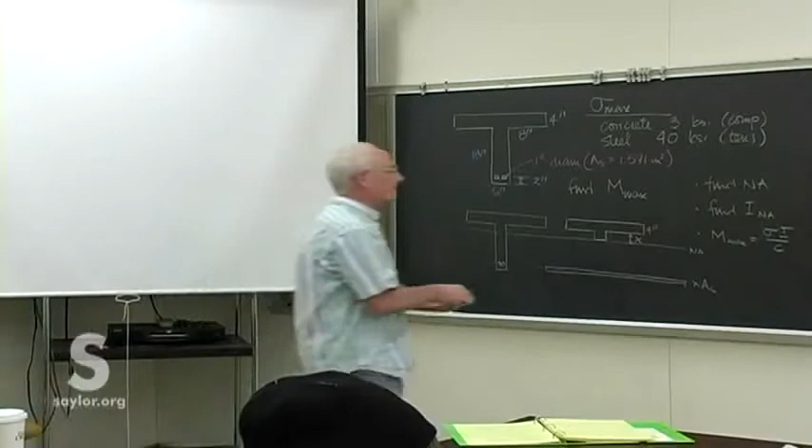Y bar A above and below are equal, and for the compound section, you just add those together.

So we really have three sections. Because we need Y bar A, and we don't know where Y bar is for that leftover T piece, but we know where it is for the two little squares. So it's always easiest to break these down into the simplest possible pieces for which Y bar and A are already known.

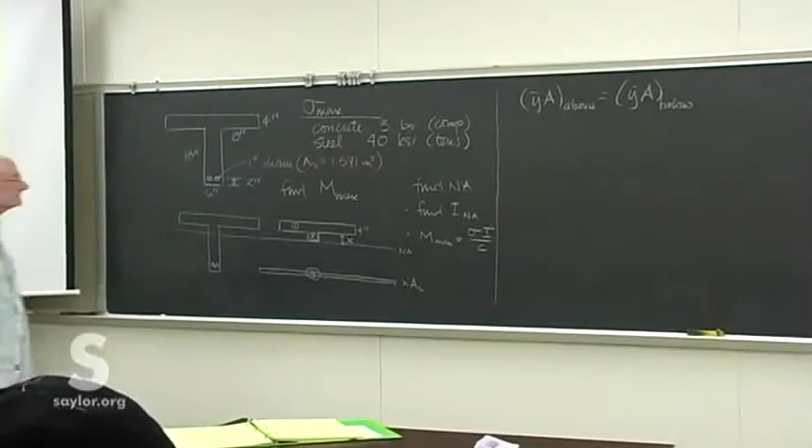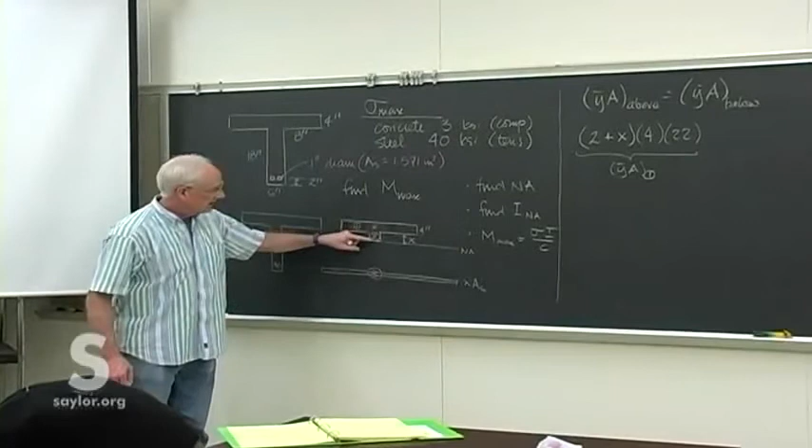Right? Nope, not you, it doesn't. Y bar is the distance from our neutral axis up to the centroid of that particular piece, which is halfway through the upper flange. That's 2 inches, and then an additional distance x down to the neutral axis. So it's x plus 2.

Y bar 1 is x plus 2, or 2 plus x, right up there. And then A is 4 by 22, 8, 6, and 8.

David, that makes sense? Is that right? You're pretty much on top of these things, so you're quiet. Yeah, I was also tinkering with something with another method and wanted to see how that worked out. That's most of them I think.

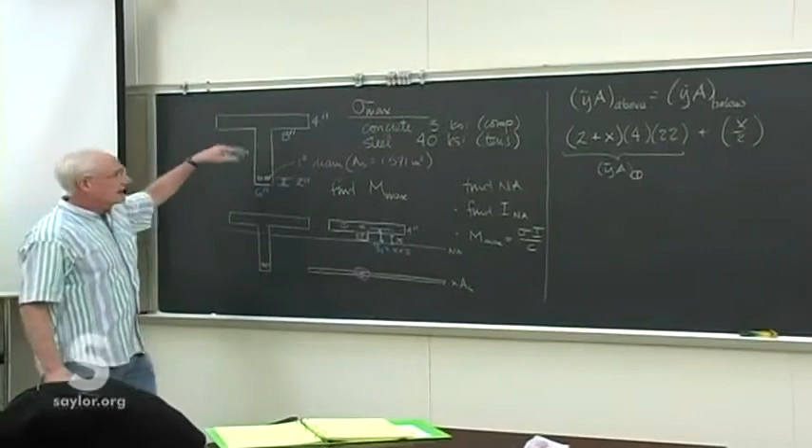And then for the other piece above, its y bar is x over 2. Its area is 6 by x. That's y bar A, area 2.

Its centroid's right in the middle. Its height is x, so it's x over 2. Its area is still x by 6, that's the little square here. So that's the area of the y bar A product above.

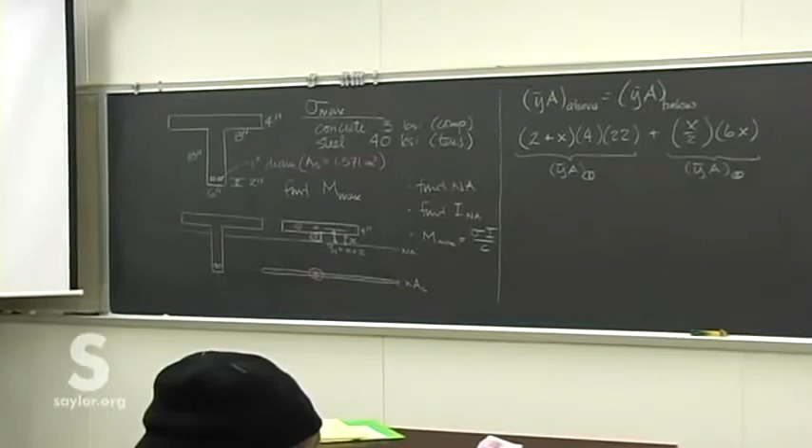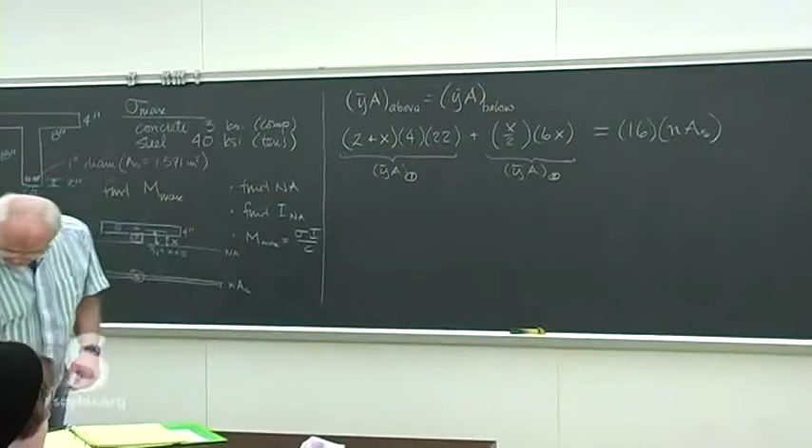And then below, we have from the top flange to the rebar, not 18 but 16. So that's our distance down there, that's 16 minus y bar, and the area is nAs. 16 was the whole thing, 16 minus that, right? Is that what you caught, David? 18? 16 is from the bottom of the top flange, but we're going from the neutral axis, so that's 16 minus x.

Now, nAs, okay I see, and that's the y bar A for area 3. What was the N, is whatever that ratio is there, 40 over 3... 7.63. Wow.

That was 2.9 times 10 to the 6th. No, 29 times 10 to the 6th. And the concrete on this problem is going to be 3.8.

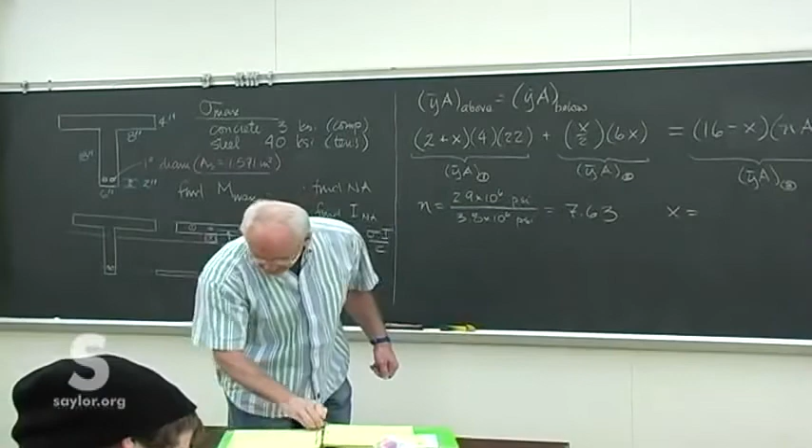All right, we're right at the end, so make sure you've got the numbers before you go. X, when you solve for it, comes out to be 0.1573 inches, about where we'd expect it to be.

I, with respect to that neutral axis, once you find that, is 35.7 inches to the fourth. Then you can figure out the maximum moment for the two of them. Whichever one is lower is the one you'd use. Don't forget the factor of n in there.

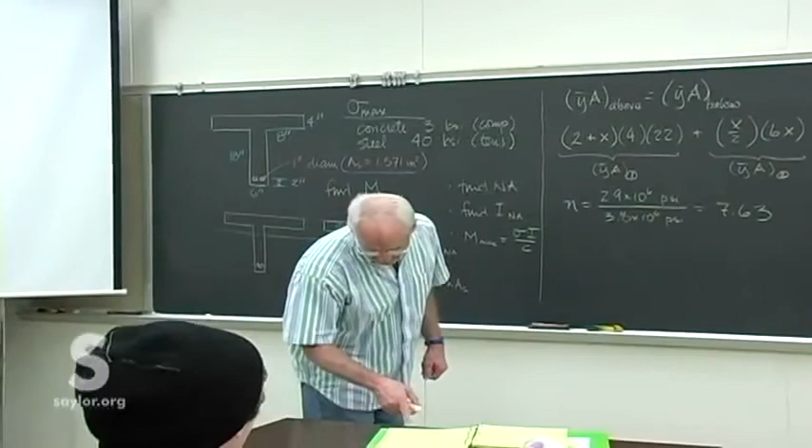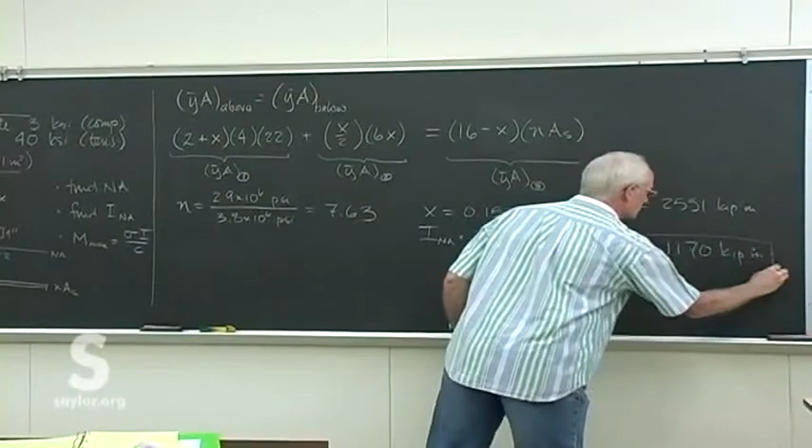So the moment with the concrete at its maximum would be 2551. The moment with the steel at its maximum, remember the maximum stress limits were given, would be less than that, so it controls, this is 1170. So the steel, the stress in the steel is the controlling factor, and so there's your design moment there.

So we should multiply that by... no, that's already got the N in it. First, factor of safety. You could apply a factor of safety to that by cutting it in half, maybe for a factor of safety of 2, perhaps more. Depends, there are industry standards, there might be even company standards as well. Call the legal office, they'll tell you what today's factor of safety is.